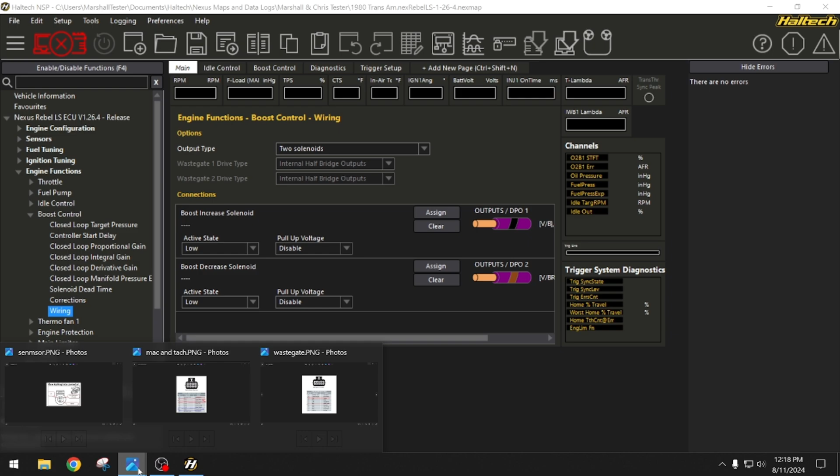There's two wires, so for our increase solenoid, we're going to run one side of the solenoid, it don't matter which, to DPO1. This is the solenoid where the onboard air or the CO2 is going to go into initially. So DPO1 on one side, and then we're going to use switch 12 volt on this connector for our 12 volts, because these DPOs are pulsated ground.

We're going to hook the tach up later also. And then our decrease solenoid is going to use DPO2, that's the one that will vent to atmosphere on one side. So we'll run one side to DPO2, and then run the 12 volt switch to the other side of both of them. DPO1 on the increase, DPO2 on the decrease.

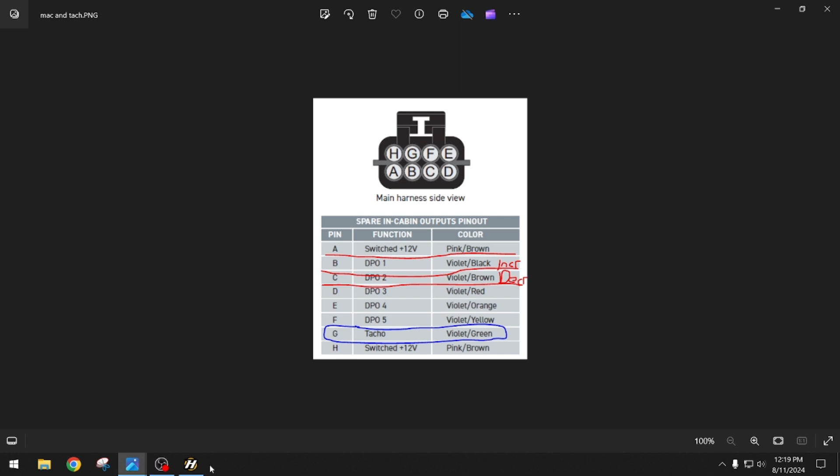Now we also have to wire in our wastegate pressure sensor. So if we go up here to sensors, wastegate pressure, wiring, you'll see that one uses AVI2. Now the wastegate pressure sensor is a three-prong sensor, and it needs a 5 volt reference source, a ground, and this AVI2.

So here we have that, this is the inputs pinout. We're going to use pin B, which is this sensor ground, for the ground, and then we're going to use C for our 5 volt reference, and then the reference wire is the AVI2, like we've seen up here. Now, how do those go into the connector?

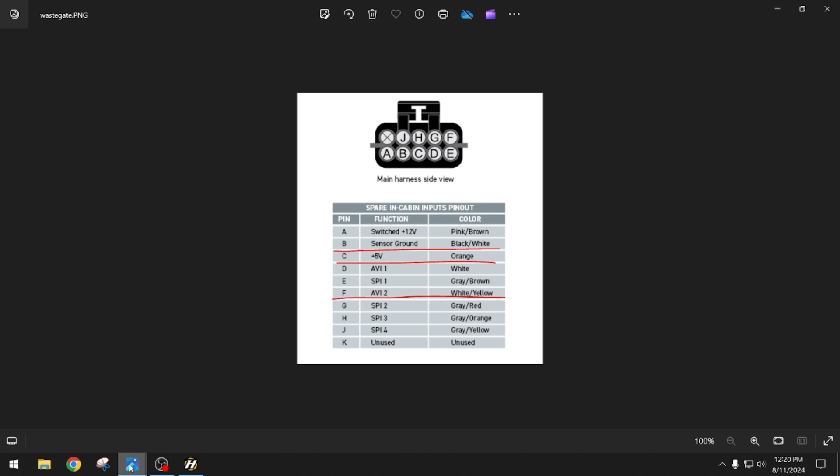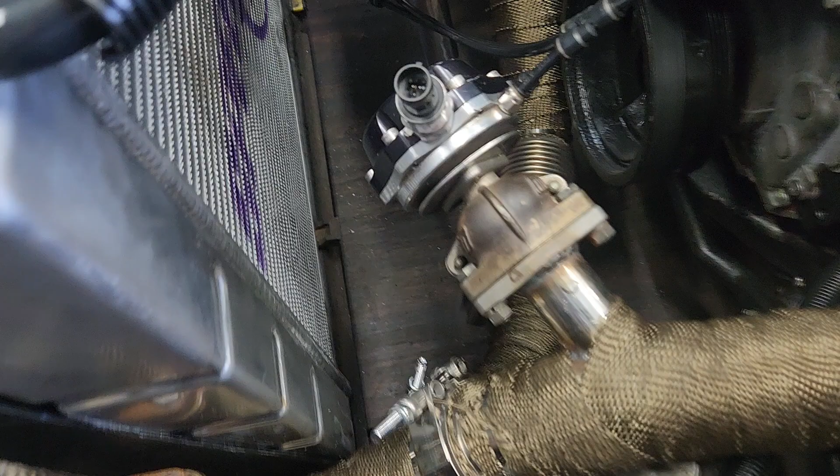So let's go outside and start wiring stuff up. All right, there's our wastegate pressure sensor, it's a 3-prong plug. That one's going to be the hardest to do because you got to run a bunch of wire. I may have to go get some wire. It looks like that's 18 to 22 gauge wire.

But in your Haltech Rebel, it'll come with a couple of extra 3-prong connectors, that's seen right there. It's got the pieces that go up in them, the weather piece, all that. There's 2 of them. So let's go ahead and wire that first.

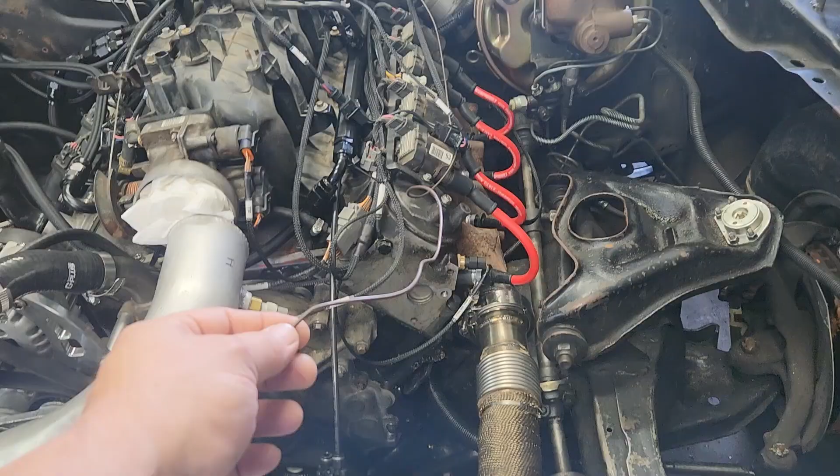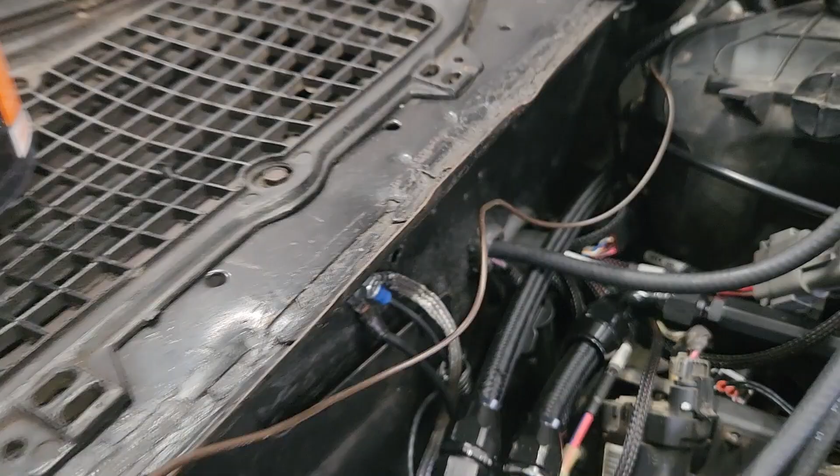So I'm just routing some wire, just to get an idea of what length I need, because that's going to come all the way around. We're going to use that wire loom on them. It's going to come all the way around, go through the dash, and then it has to go to those connectors right there. So just get an idea of what length wire we need.

So we're going to use this for red and white. We'll use the red for the 5 volt, and we'll use the white for the reference wire, and then we'll use this, it's like brown, for the ground.

Alright, so we go ahead and put this weather strip piece on, then we'll go ahead and strip this. This piece is set in there just like that. The strip part will go on that part, and then the wire piece goes back here on these big loop things. And then we'll crush those down on the wire, and crush this down on the wire back here by my thumb.

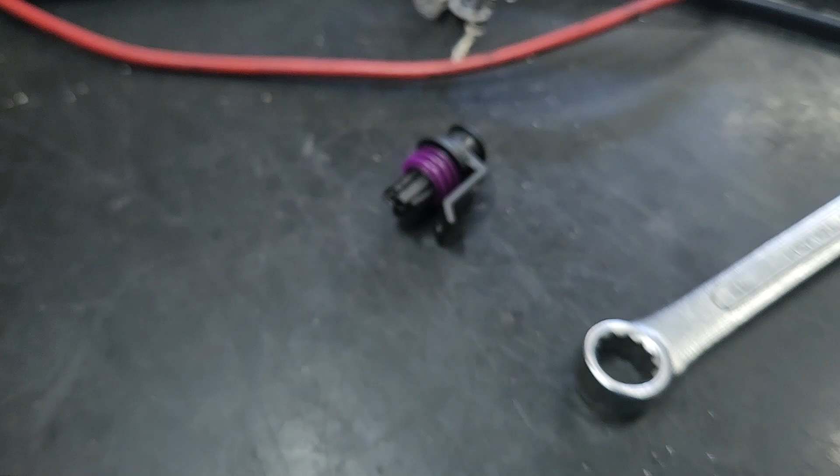And just like that. Now this will only go in one way, the way it's slotted. See, it's got that slot piece on there, but it'll only go in one way. You stick it up in that connector and push it up in there for the prong you want to use, push it all the way up in the hole. And then pull back, and there's a little clip on these that'll grab it and lock.

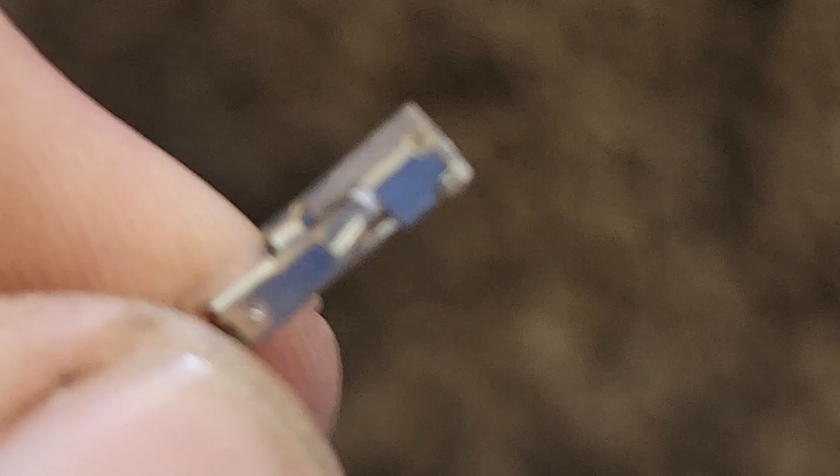We can find it. Yeah, it's this clip right here by my thumb. Yeah, that'll clip and lock. And per our picture, the ground goes, that's what we're going to use for the ground, goes in this one right here.

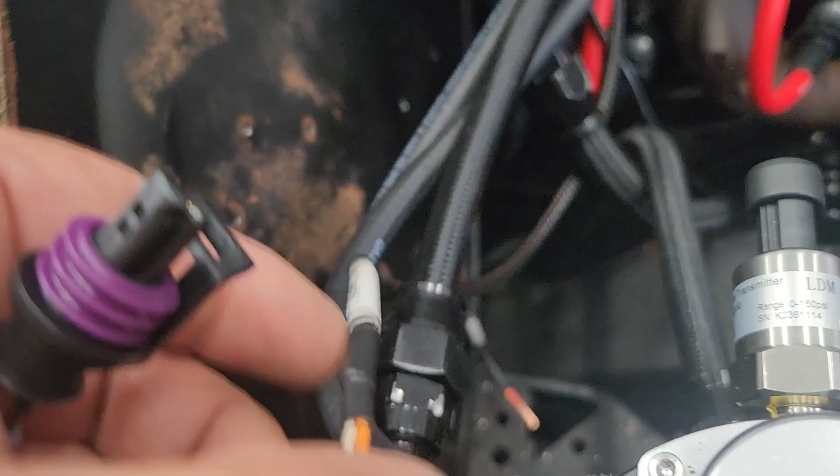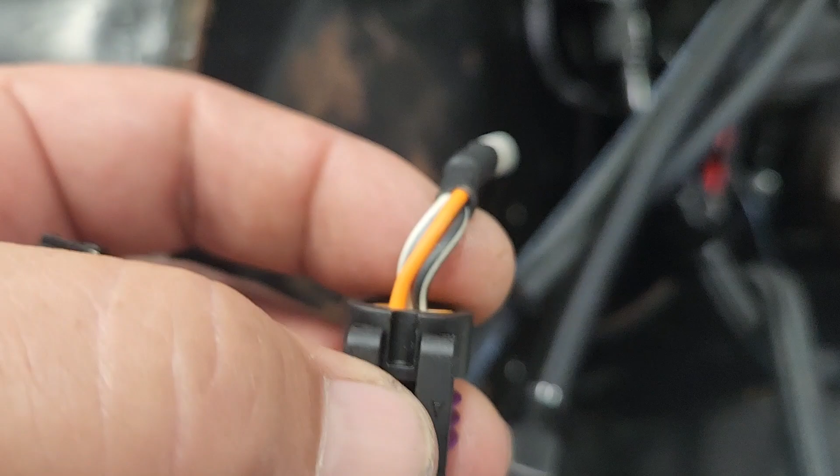And also the fuel pressure gauge, it's a 3-prong sensor, and it's already wired in. Fuel pressure, we can reference this one too, because it's the same way. Ground top right, 5-volt top left, and then our signal at the bottom. But like I said, I pushed that in and then pulled back on it, push it all the way through, and then pull back on it, it'll lock.

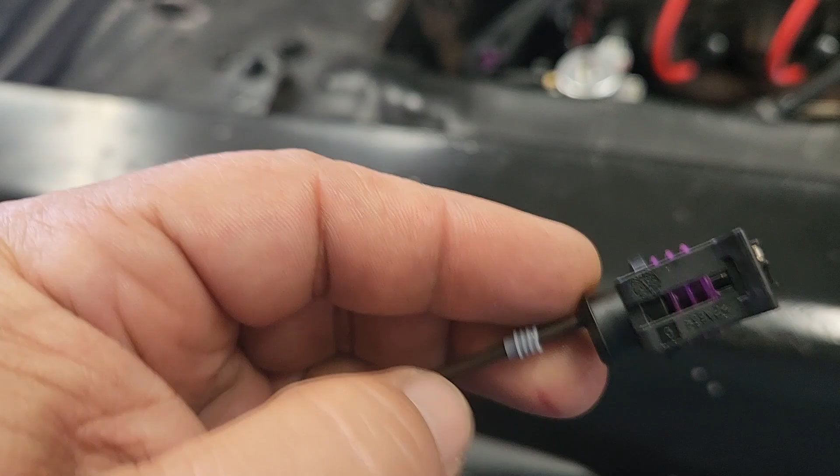And then slide your weather stripping all the way up in the hole. Now we'll do the other two. After you get them all on, it comes with this plastic piece you put right there, and there's supposed to be a piece that goes on the back that helps hold these weather things down inside there, these rubber pieces. I don't see nothing in there.

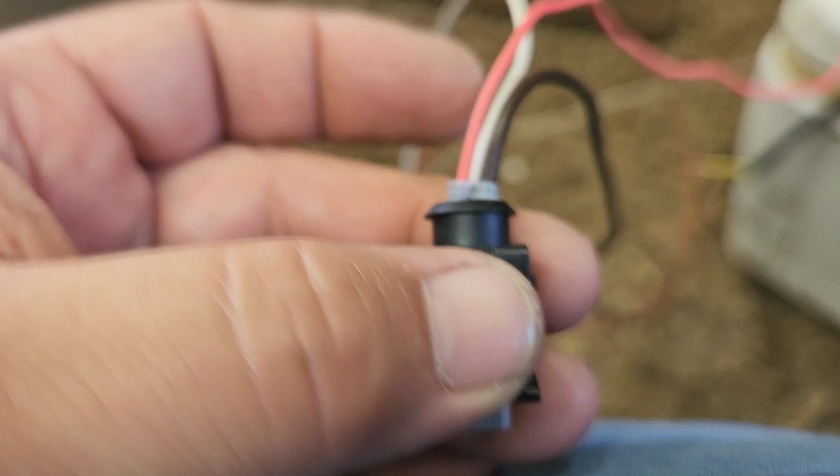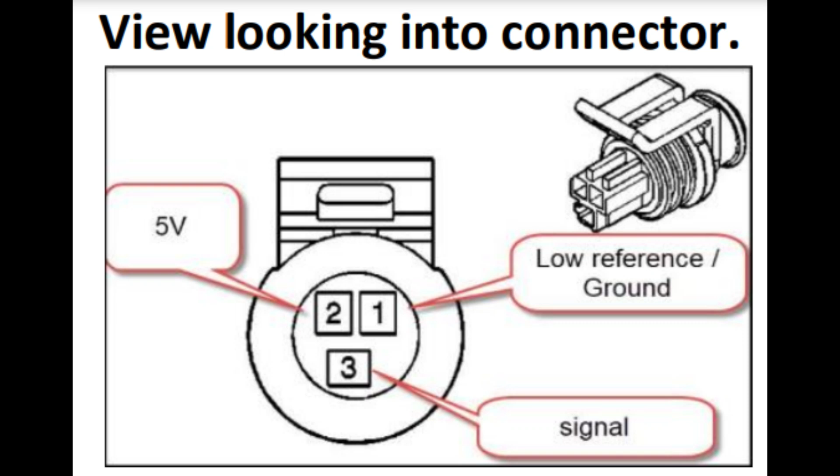Whatever. But anyway, top right is the ground, that brownish black one. And then right here, our red is going to be our 5-volt wire. And then the white wire is going to be our signal wire, just like the picture shows right here. And that also matches what they had for the fuel pressure sensor 3-prong plug as well.

So yeah, I know there's a piece that goes on this. I can't find it. There's a little lip there, so I put the wire loom up there and I zip tied it right to that lip that was there. Look on this one, see how it's got that lip there? I zip tied it right there.

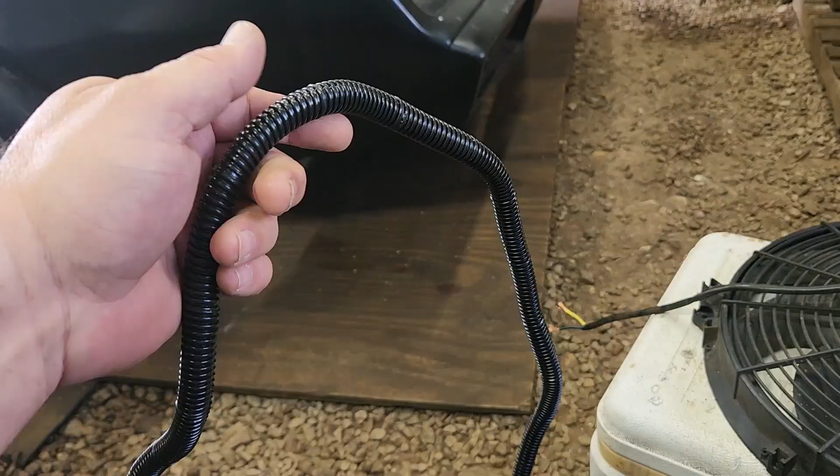I'm also going to go through here and put some black tape, maybe every foot or so, so the wires can't jump out. Alright, I lied. I had these small zip ties, so I use these small zip ties instead, every foot or so. But black tape works too.

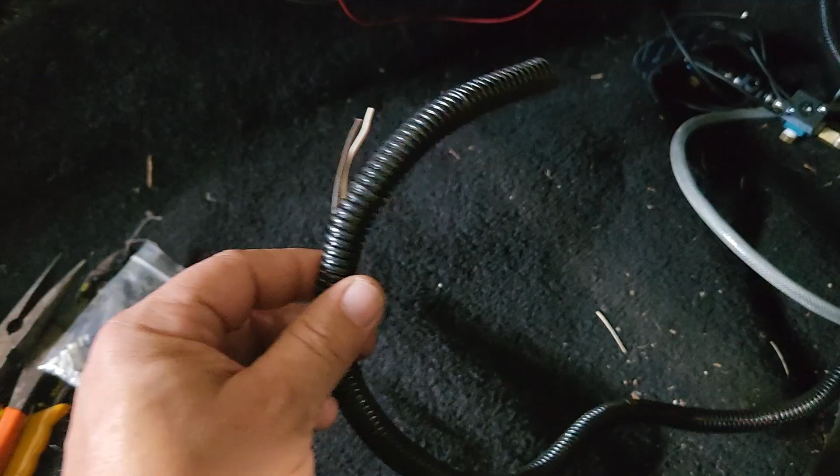Now I ran it through the firewall, and it's way too long because it's going to go to that connector, but I'd rather it be too long than too short, for sure.

And we're going to use this connector, which we've already used for our trans brake and our bump. And those were SPI1 and SPI2, I think. I don't know, you might have to go back and look at the video on that. But these, from what I gather, the SPs, SPI or whatever it's called, we'll see here in a minute.

But from what I gather, these can be activated through, these are inputs. Did I say outputs a while ago? They're inputs. But anyway, we got our bump and our trans brake here on the SPI, I believe they're called. And those, from what I gather, they can be triggered through a ground or a power. So I ran those to the trans brake, and then the bump, and then the other side of the button I ran to ground. I just ran it up here, grounded it up there.

We've had quite a few things grounded up there, and it worked just fine. Alright, going back to the trans brake, which I already made a video on that, but the SPIs, SPI1 is the trans brake, SPI2 is for the bump. You can set these to activate through a power or through a ground. So like if I push the button, I could have it to a 5 volt, a 12 volt if this was set to rising, but it's set to falling, so it would go through a ground.

You hit this question mark, it says falling, voltage falls to ground to activate. So that's the way we've got it set. We got it running from SPI1 to the button and then to the button to ground, and it's set on falling to ground, but you could do it with a 5 volt or 12 volt as well.

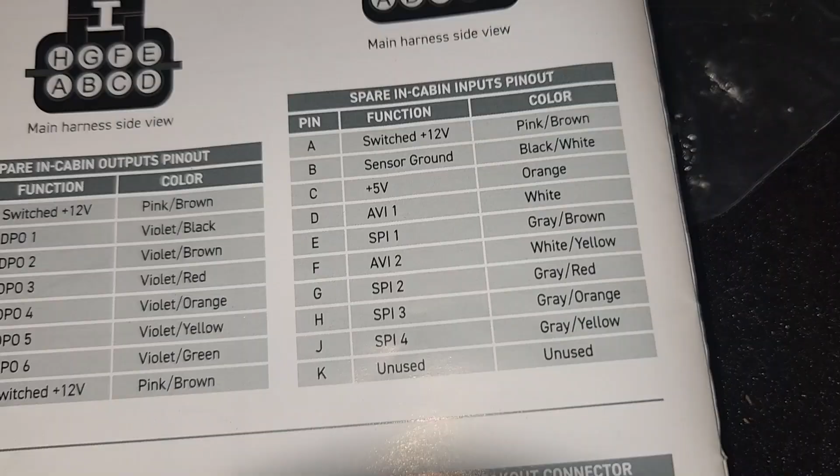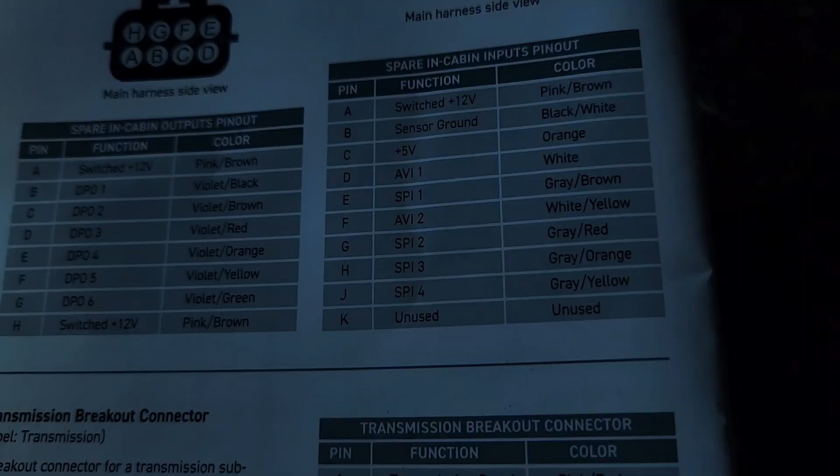But let's disconnect this connector and start wiring in this wastegate pressure sensor. Yeah, there we go. So the SPI1 and the SPI2 we used for the trans brake and the bump button. Is that better? Yeah. So now this time we're going to use this 5 volt orange, this sensor ground, and the AVI2. Now I guess we'll go ahead and we'll take this clip off that holds the wires in.

It just clips on each side. Just pull it up, take it out. Kind of got to snake it out of the wires. Now we'll go ahead and put the weather strips on these 3, and then those little weather strip things, the white things, and then we'll go ahead and strip the wires back.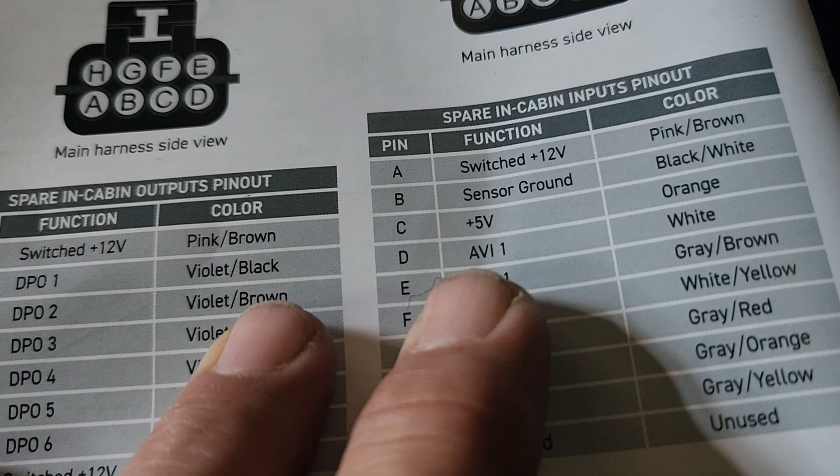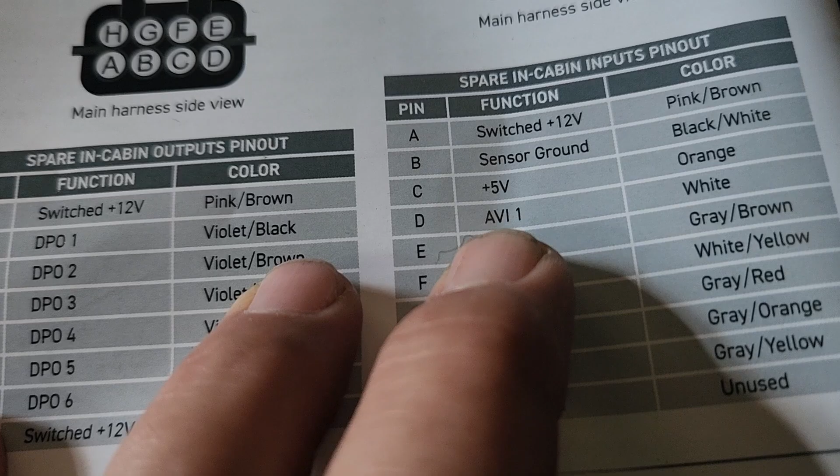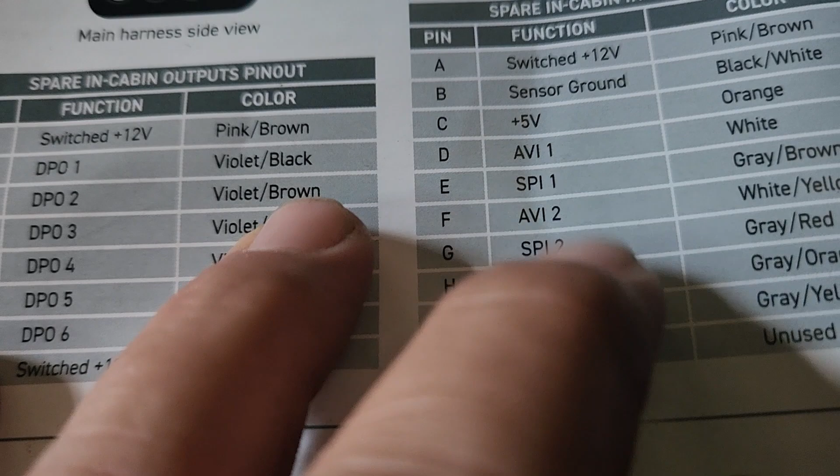These AVIs, I guess, for those 3-prong sensors, they just read back that 5 volts from the sensor. I think the sensor's like 0.5 to 4.5. So you got the 5 volt going into it, the ground, and then it reads that sensor, lets that 5 volts come back through what we're using, AVI2, lets it come back through there, and then it just reads the volts of the sensor based on how much pressure's on it. But yeah, that's how those work.

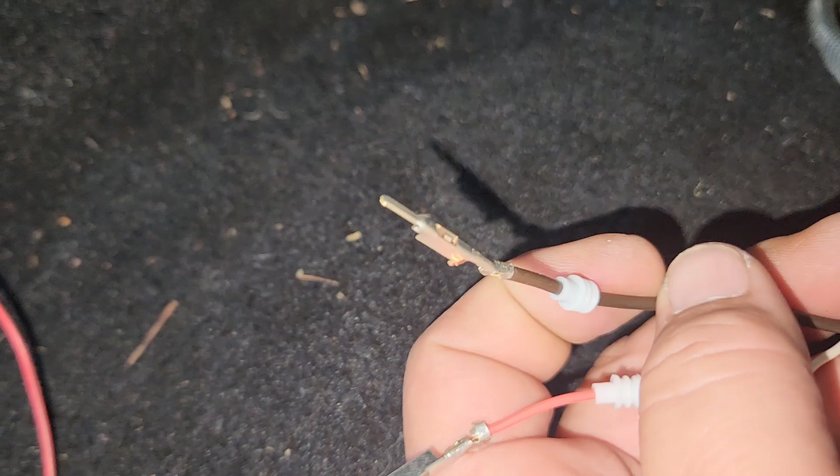Alright, and just like we did with our wastegate pressure sensor, we stripped our wires back, put our weather thing on, and put our clips on. Now where do they go? When you're looking at these directions, I did go inside and mark all these to what we had them as. Alright.

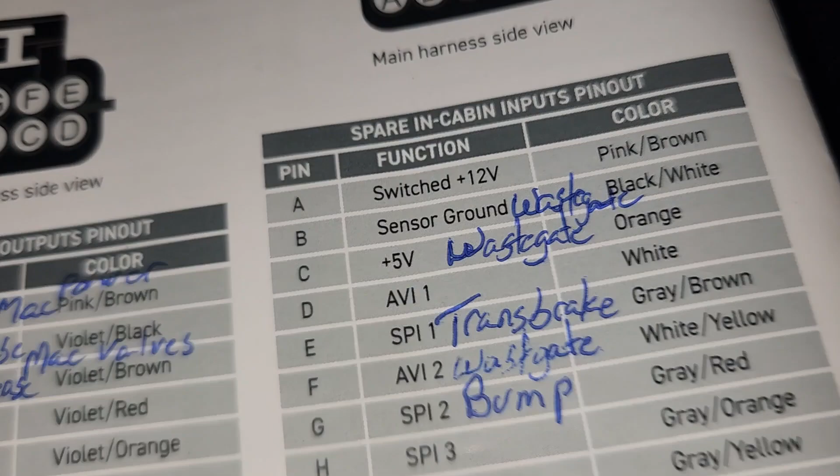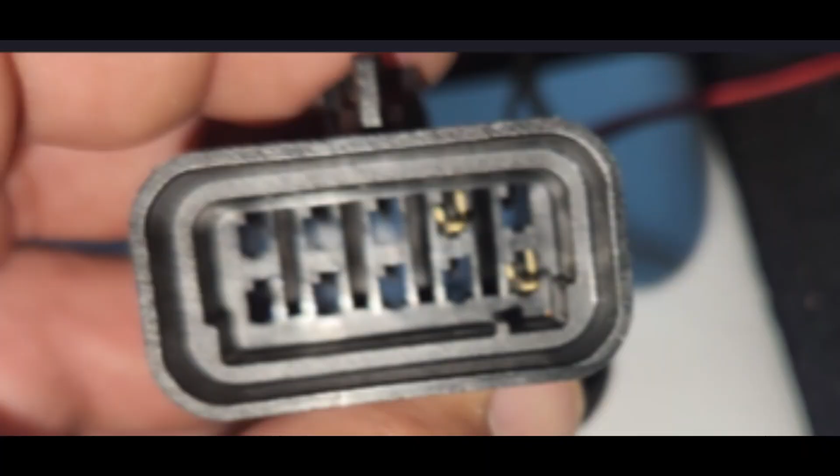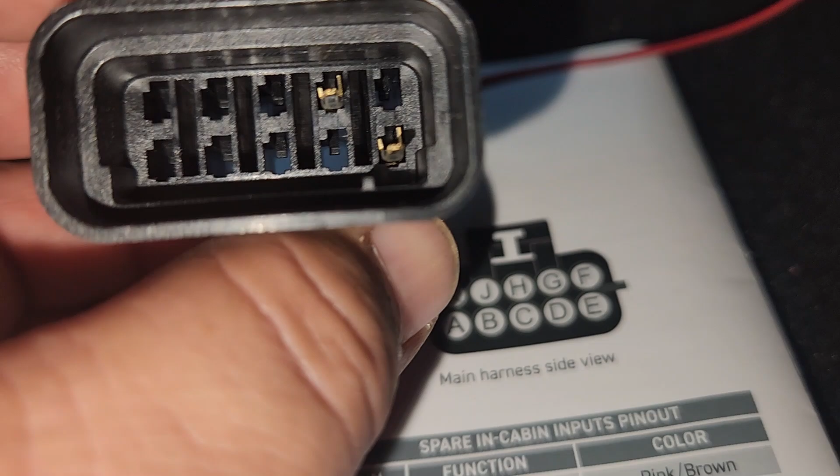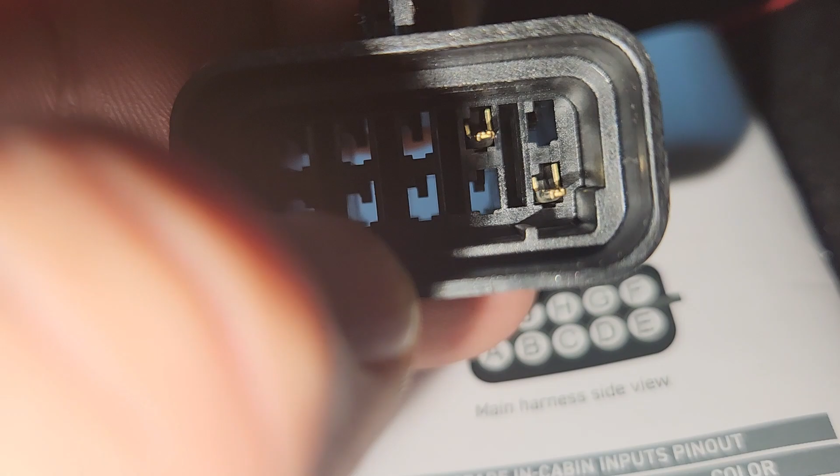So our black, or brown, or whatever color that is, was our sensor ground. That's going to go in B. Now this is how you want to be looking at the plug when you do this, per the direction. As you can see, we used E for our transbrake button and G for our bump. G and E, G and E. So our ground is going to go in B, which will be the second one from the bottom. We'll go ahead and stick that one in.

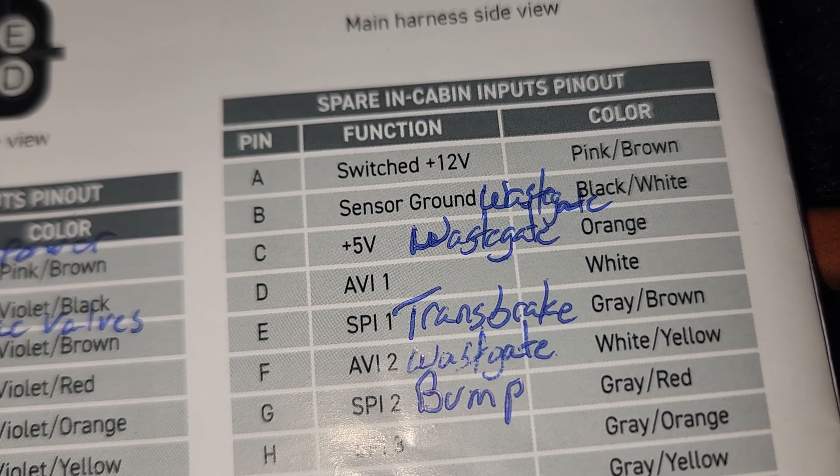B for our sensor ground, and there we go. B sensor ground, the second one from the bottom, and there it is, right there. Now we need our 5 volt reference, which we use the red, so that's the C. That's going to be the third one from the left, the middle one, and the bottom.

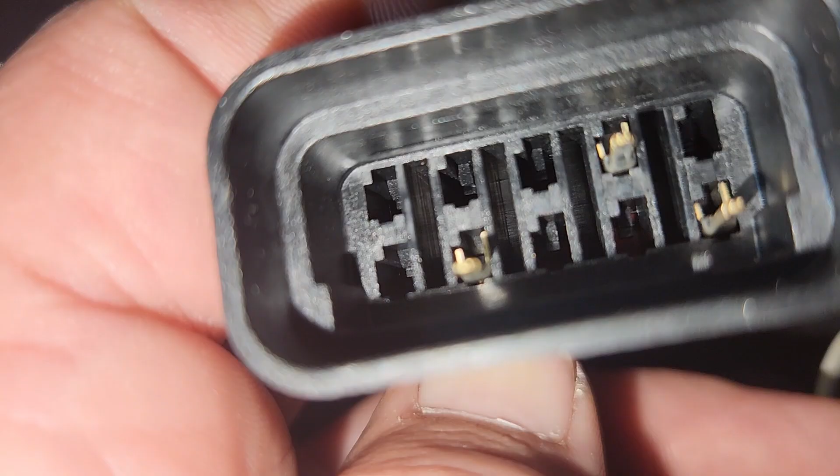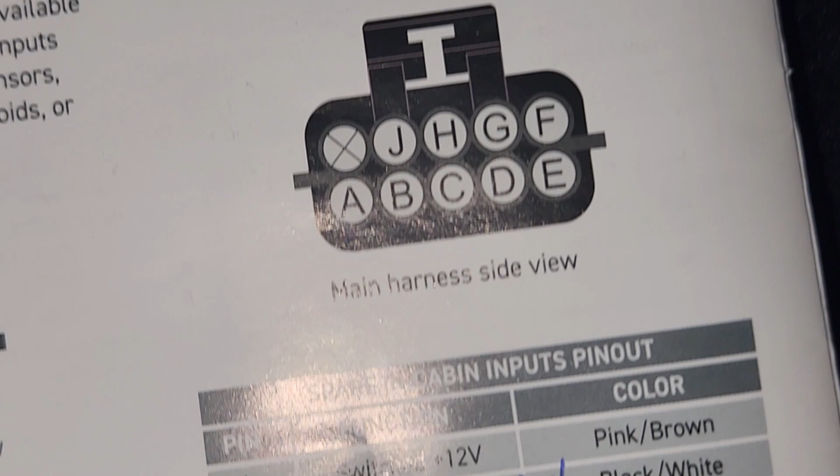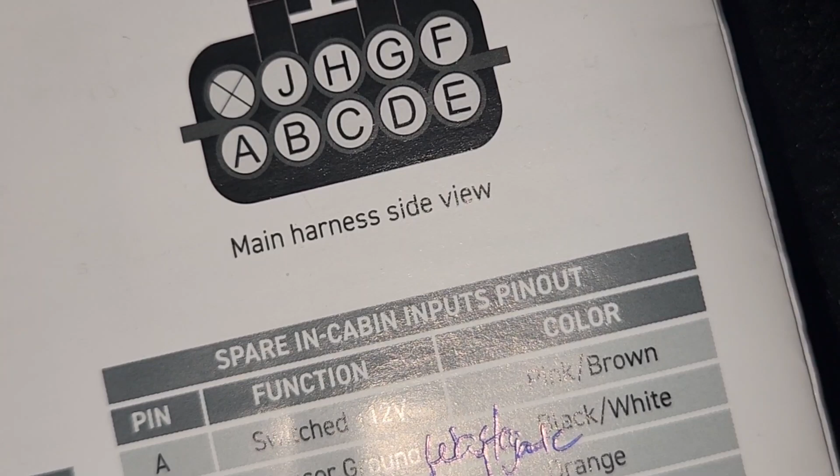So we'll go ahead and put that one in. And F will be the top right. We put our white reference wire in the top right one, which is F. AVI2, and then B should be the black one, second from the right. It's really brown.

And then red in C, which is our 5 volt reference. There we go. Wastegate pressure sensor is all hooked up. We can go ahead and plug that one back in because we don't need to use it anymore for what we got. We're going to add a flex fuel sensor.

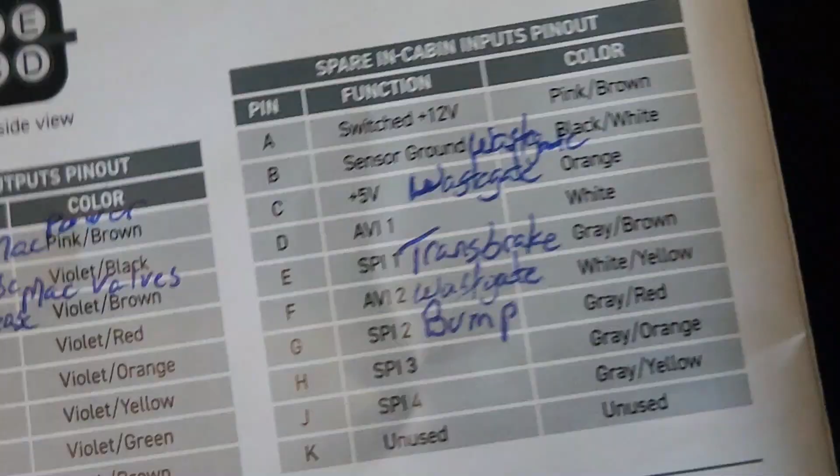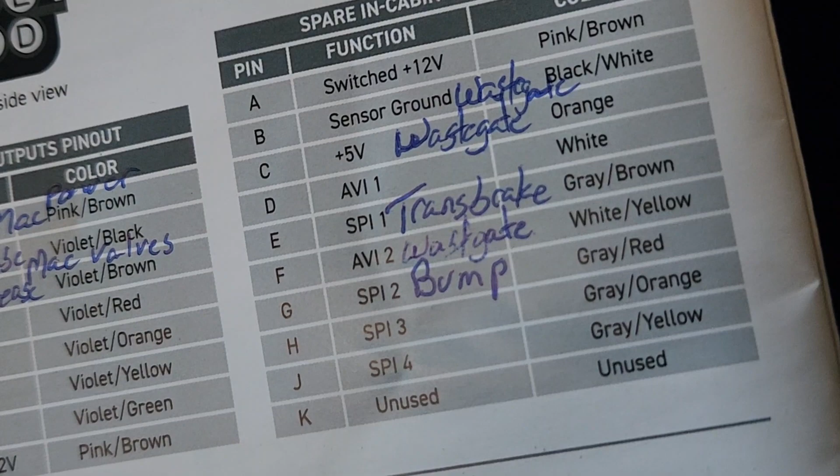Hopefully we got enough here, but I'm not sure what those are going to use yet. But as you can see, we got 1, 2, 3, 4 DPOs left. We got one AVI left, and then 2 SPI left. But we want to do a flex fuel sensor, shifter, and then traction control.

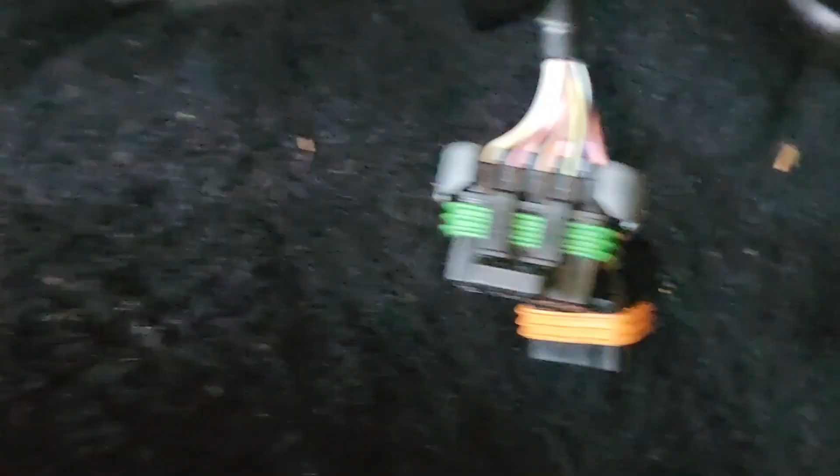But let's wire in these increase and decrease solenoids. That one's going to go on the one that says output, which has the orange weather thing on it. Oh, and we clip that gray piece back on that we took off before. You got to kind of slide it in there, straddle the wires with the grooves, and then it just clips in on each side.

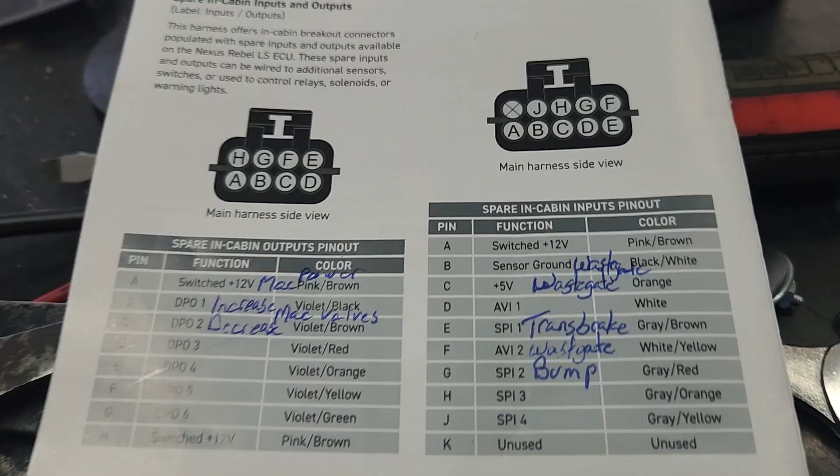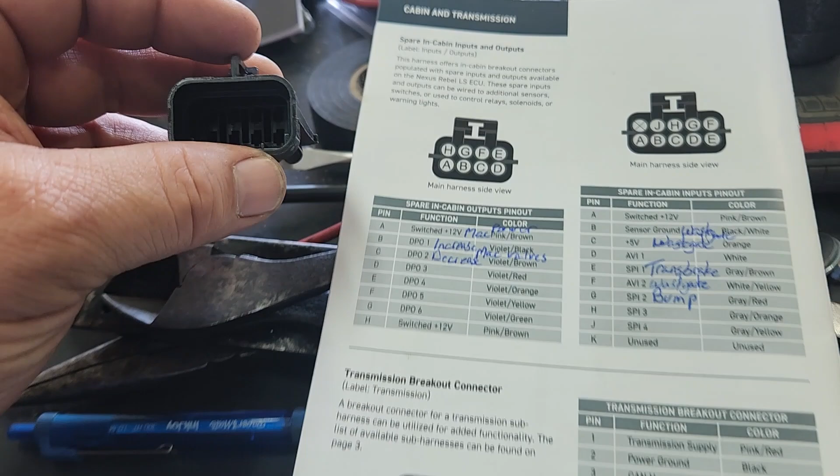Alright, so the one we was messing with was an inputs connector, it's a 10 pin. The outputs, it's an 8 pin, and it's this one right here. We're going to wire this one in the same way, because that's the way the connector is. You're looking at the face of the connector, right at the face of it.

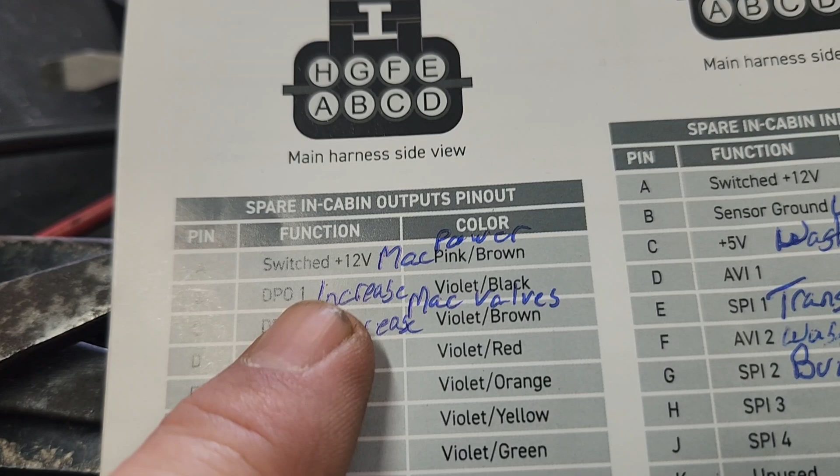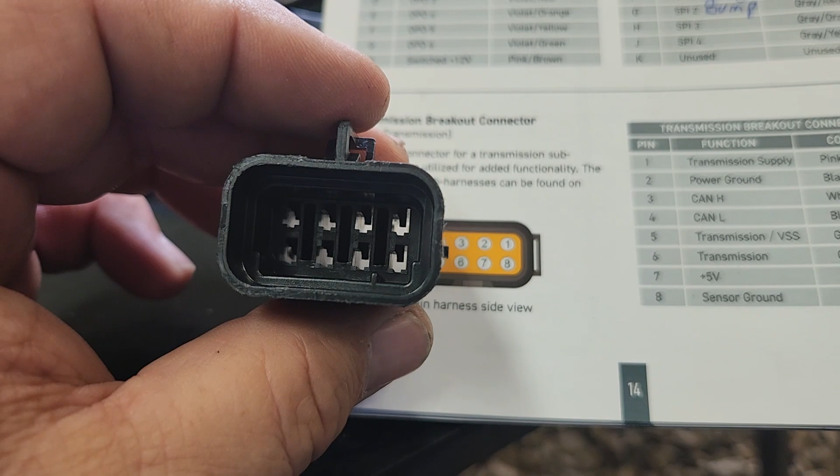So both sides of the MAC valves on the increase and decrease need 12 volts. So we need to come out of A, which is going to be with this up top, which is going to be the bottom left. We need to come out of that split with 2 wires, and we're going to try to find a red for that. Now I took 1 red wire, twisted them together, made 2 red wires. They're faded, that one looks yellow.

But it's the same wire, it's just faded right there. This is all the same wire. But I use those little heat solder things, they got solder in the middle, and they heat wrap and solder it all at the same time. But if you get them too hot, the solder comes out a little. So we're gonna put this over it, and we're gonna melt that down on there as well. And that'll be our power coming out of the connector, and then to both of the MAC valves. And there we go, so professional.

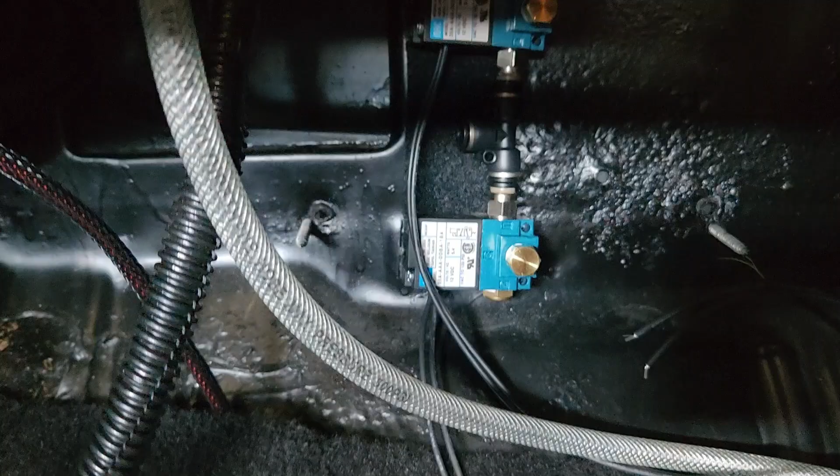Yes, yes. Alright, so I elected to hang the MAC valves right there. So these wires, they're going to reach all by themselves. So we don't need to make this wire that long. So we'll go ahead and cut this one down and plug it in.

Alright guys, here's what we got. Our output connector, we got the red that comes up and splits, runs to A. That's A per screen. A, which is our switch, 12 volts. So that splits and goes to each solenoid.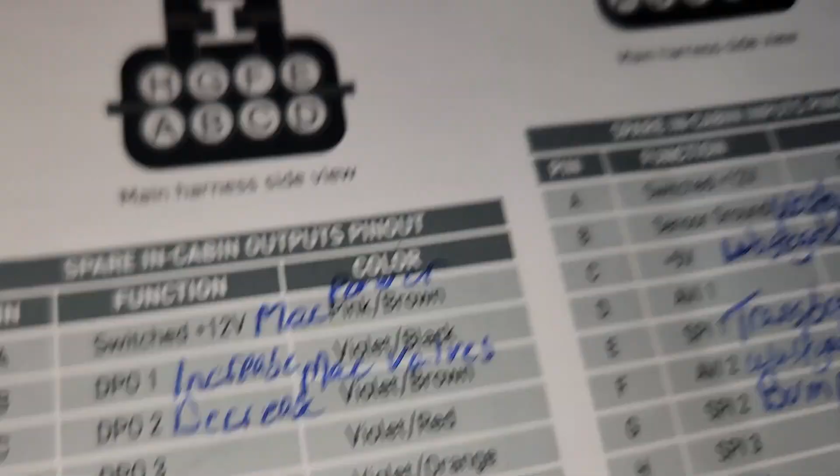And that leaves pin C, the decrease solenoid, and that one right here should go to the bottom solenoid that vents out the bottom. That's not a plug, that's a vent. There we go, that's pretty much it. Then we plug it into that outputs connector, and that part's done.

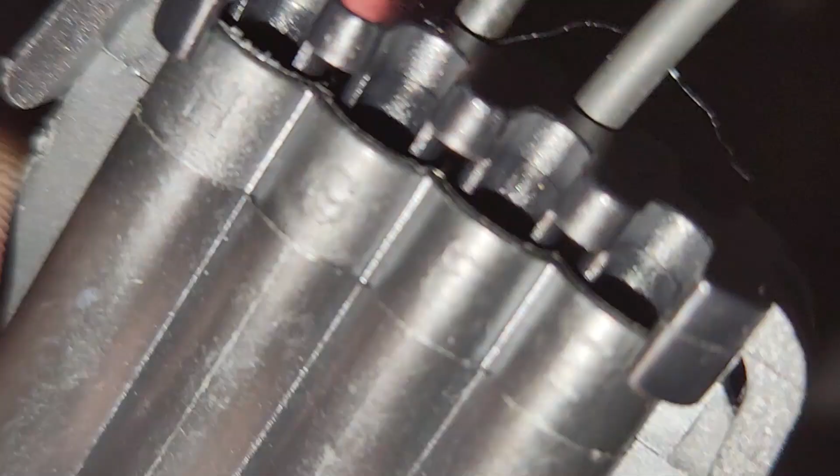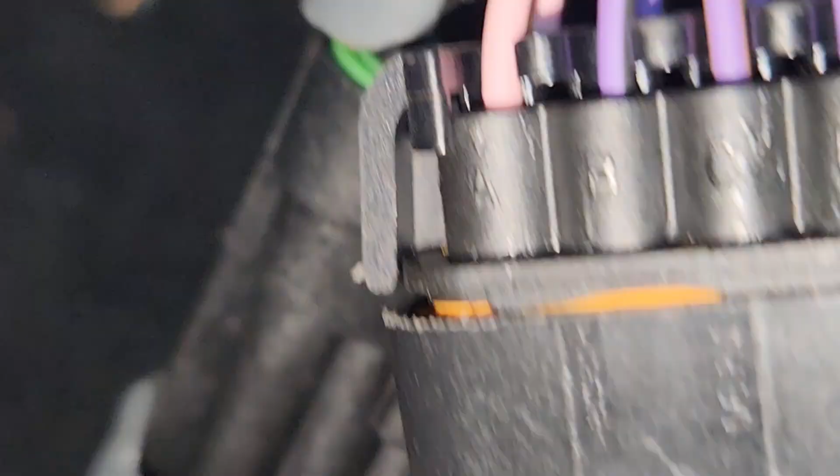If y'all look really close on these connectors, HGFE, yeah HGFE, and then ABCD. They're marked on there, and they're marked on there as well. See, ABC. So when we plug it in, it should line up with ABC there. There we go, it's plugged in. ABC, ABC, just like that.

And then we'll just run our push lock hose.

Yeah, first time I've ever messed with any aftermarket ECMs or anything like that. So yeah, I couldn't find a lot of information on how to wire this stuff in, so I thought I'd make a video of how I did it. I hope y'all liked it, and thanks for watching. Have a great day.